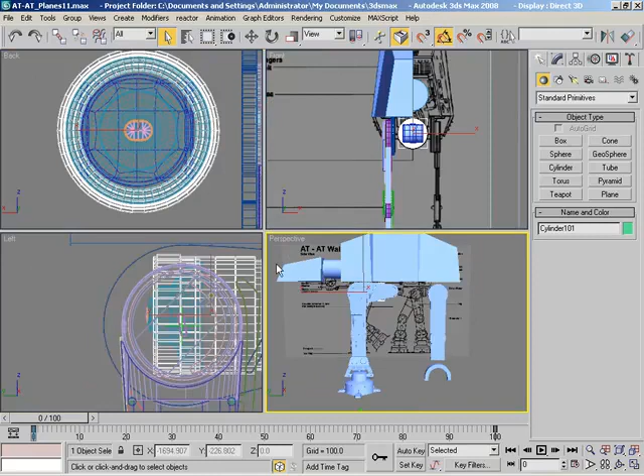In this video, Zach will continue modeling the AT-AT-like vehicle we're creating for UT3. We generally try to keep these videos to about half an hour, but I just don't see that happening tonight. There's a couple things I want to do real quick, like grabbing these pieces and some other bits and pieces at the Transdrive.

Shift and Alt to add to your selection. All I want to do is center up the piece we were making to the Transdrive so it kind of fits around there. It doesn't have to be exact, we can make it exact later, I just want it close. Okay, so now I'm happy.

There's a lot of things we can do to the Transdrive, but before we do, I wanted to show these fine gems off. These were images sent to me by 3D Buzz's own Count Zero over on the forums. I remember his first name is Julian, but I can't remember his last name, and I should have written it down before we started recording, but I didn't, so my apologies. This is some photos of a master replica's studio model, a replica of the studio model.

Fantastic reference images. I have a master replica of Darth Vader's lightsaber, which is absolutely fantastic. Actually, I have two of them, the neon one and the regular one. They do a really, really good job, so we're going to be able to get a lot of detail from this.

You can already see some things on the Transdrive we could take a different approach on, like these little tiny ridges that run all the way around. I was thinking about this - you could model these, or you could probably add them into the normal map later manually if you wanted to. Very easily get away with a normal map, and you just texture those in when you go to create it. But we're not even going to worry about that right now.

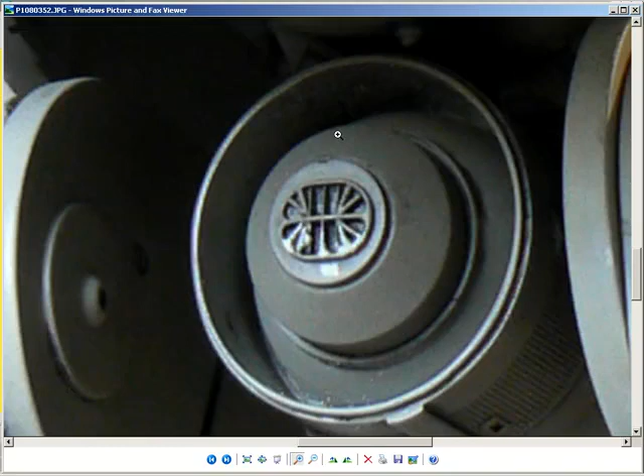I'm more interested in getting more of the geometry of the Transdrive in place. I'm noticing, taking a look at that front little funky symbol - yours turned out pretty darn close to that. It was alarmingly close just from seeing a couple of reference images, but that's cool, it makes me kind of happy. I did something right anyway.

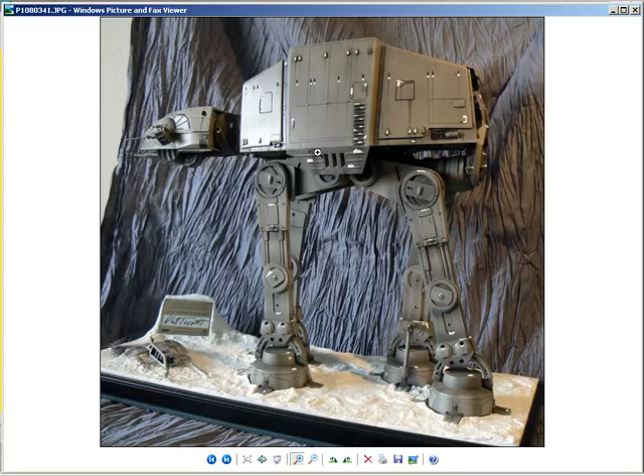There are some differences between this and some of the things we saw on screen, but we've seen that there are differences with just about every image you've opened. Exactly, so really it's just picking and choosing which ones you like best to incorporate. So anyway, the next thing we could tackle is actually starting some modeling.

That'd be such a nice picture if it were in higher resolution. You want to go ahead and get the back leg in place and its plate that it connects to, so that I don't have to actually do any modeling for a minute - I can just fool around for a few minutes while we line up where the back of the Transdrive is going to be.

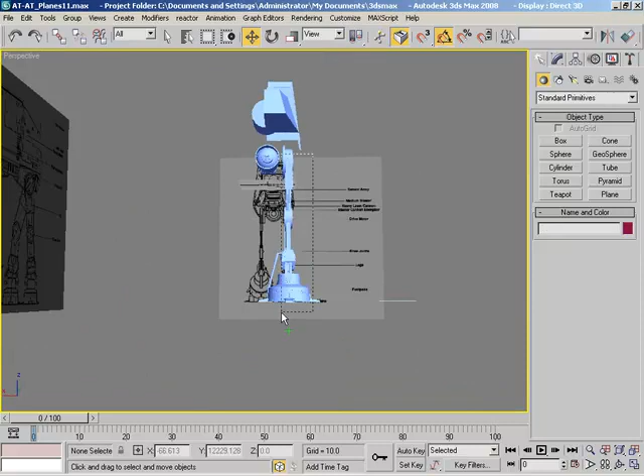Let's see here, if I can do a really clever marquee selection there, and then another one down here - I think that's everybody. Just to be on the safe side, because I'm picky, let's group this and call it R_Foreleg. I don't know, did it grab that too or something? Oh, it doesn't matter, it's fine.

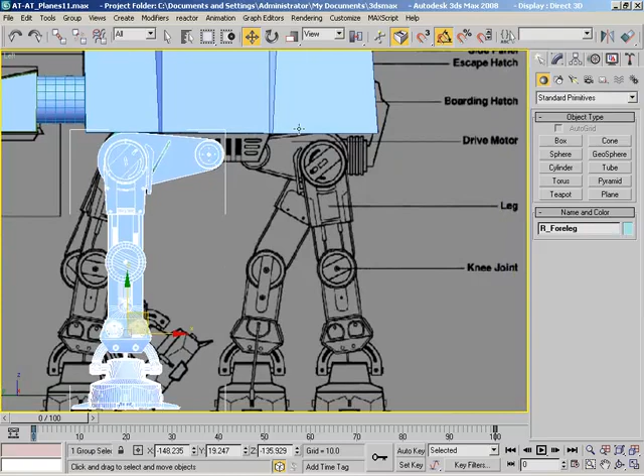Okay, so now we just need to mirror this over. I'll jump over here, let's hit F3 so we can see vaguely where this is going to go on the image plane. Let's hit the mirror button, and we want a copy, of course. Let's just see if we can kick up that offset - oh, the spinner is slow today. There we go.

That's interesting. It's like the plate is... like the back plate's not the exact same. That's something I wouldn't have guessed either. But that can just be adjusted. Yeah, of course. So we'll get the leg kind of in place and not worry about the rest of it.

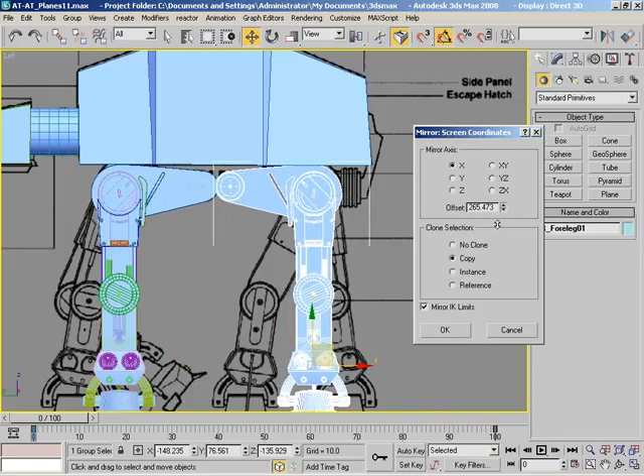So that's pretty close. And click OK. I mean, everything else seems to be lining up pretty well.

Okay, so I want to investigate this. What's this all about? Oh yeah, I have that modeling material on. Wasn't that a handy decision? So yeah, that is much longer.

It'd be cool if we could, let's see, what about that great big picture that Count Zero sent us? I don't know, I'm doing the whole put-your-fingers-against-the-monitor thing and putting smudges on it.

And it looks like to me they're about the same length. In fact, from this angle, it actually looks like the back plate is longer. And that, who could tell from that? Any other images? Oh, I've got images coming out of my nose.

That looks pretty even to me, but that's from way back here. These are the troubles that trouble a modeler. Did I skip anything good? Not really.

All right, back up. Right here? Yeah, just you're at that funny... I'm looking at something different. I'm looking at how much space is between the two. Like, between here, yeah. How close is that?

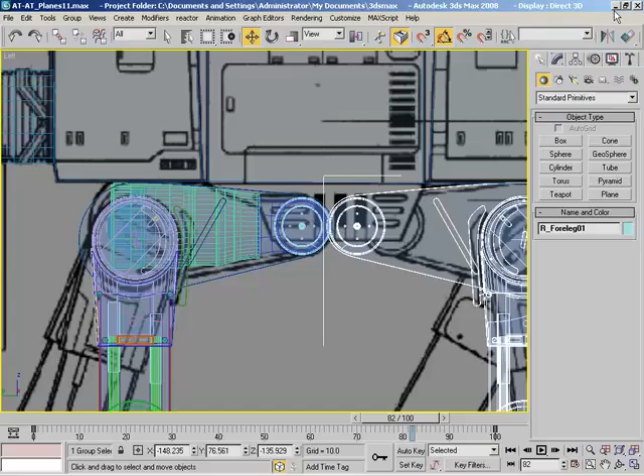Because yours obviously don't overlap at the moment. Well... do they? No, but that would never work mechanically speaking.

So I think a compromise between where it's at now and the other one. Maybe just slide it back to here and kind of call it, because it seems like they should be sort of centered up underneath this armor.

That is something that I felt like I'd kind of noticed. Almost like this little plate of armor here drops down almost to protect those. Because really, if you could get a good shot at those, this whole thing is useless. It's done walking anyway.

Ooh, and these could be useful. Maybe, if the guy would just back the camera. It's like you just want to talk to the photographer. It's like, could you just take a step back?

If you kind of interpolate again, I got my fingers on the screen again. I'm still getting this about the same size.

So it looks like we may have just discovered inadvertently an interesting discrepancy in the image planes. Unless I'm just completely out of my gourd.

Useless, useless, useless. Maybe kind of useful, even in that this is not really an official model, but still. I'm trying to be all precise. Yeah, I'm getting the same size again.

Okay, so I say we just kind of try not to make a user view and just do a compromise and leave it maybe right about there. Okay, so that solves that one.

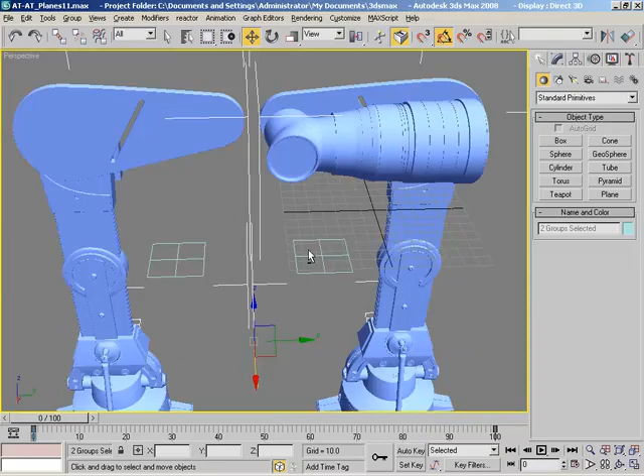All right, so let's see. From here, there are a few more things to this front piece of the Transdrive that we need to add. Of course, we need to go ahead and get this connected over. And there's an interesting connection that takes place there.

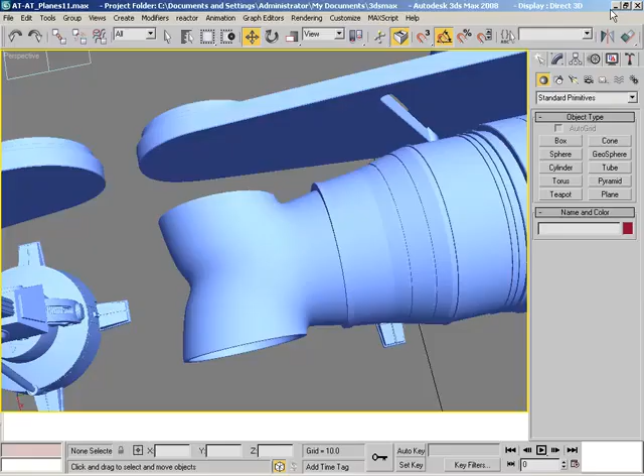I could just go ahead and model it, or I could take a minute and try to point out what I had seen. Let me just go ahead and model it, because we've already been looking at pictures for a while. Sure, let's just jump over here, and I'm going to kind of shade things down a little bit so I can see through.

I'm not really paying attention to the image plane so much as I am just trying to make sure I can see all my geometry. I'm going to create a cylinder, and something like that will probably work. Give it some amount of height. I have no idea how much, nor am I really concerned with all that.

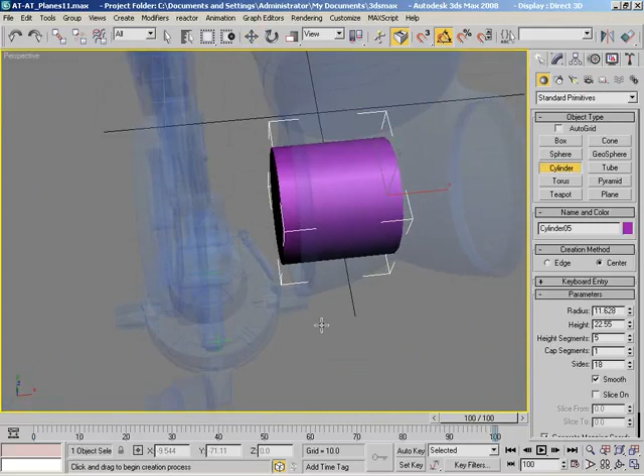Now let's give it a little bit of partial shading.

I remember the old days when I was using Macs, and granted it could have been a video card thing back then, when it wouldn't do smooth transparency like that. It would get all spotted and dissolvey.

Dissolvey, nice word. Well, it's not mine, that's like from Photoshop when you use the dissolve blend mode, because that's what it looks like. Don't pick on me because I said the word dissolve. I'm just saying, nice word. No, I heard the tone, man. No, I heard, it was honestly a nice word.

Okay, let's see, 21, 22, 23, 24, and then I can maybe grab these guys and maybe lose them. I don't know here, let's see. Let's go ahead and convert this.

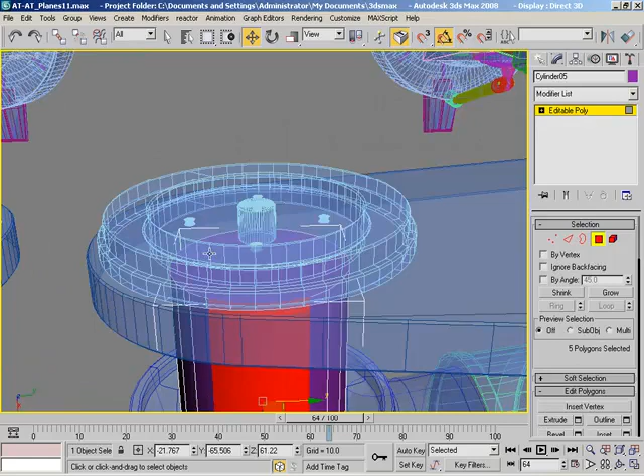I'm not too worried about nickeling on something that we're only going to see, we're never really going to see it edge on. So let's convert this over to a poly. Let's hit 4, and 1, 2, 3, 4, and 5, and 6, and of course...

Okay, and I'm almost reluctant to kill out these two guys. Almost like I wish I had a face or two more, but I'll go ahead and do it anyway.

Hello? Max is taking a second to think about this action. Well, we'll give it a minute, we'll give it a minute, because I really don't want what I think is about to happen to happen.

So how about that radio show tonight? Man, that radio show was awesome. I wish we had more radio shows like that.

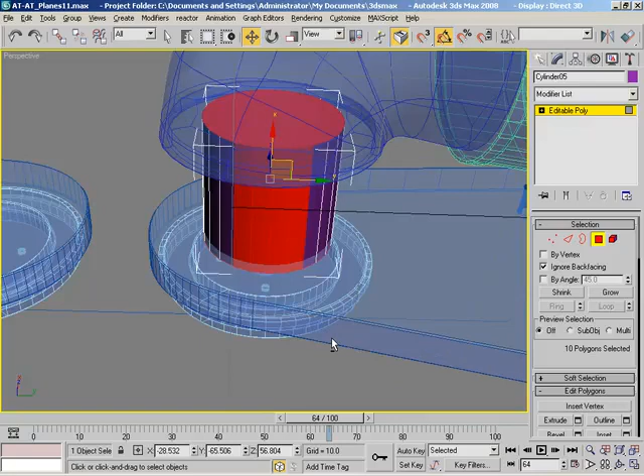I wonder if I've just lost my viewport. Yeah, I just lost my viewport. I don't know what that was all about. But now I hit delete and everything's fine. So, hey, don't knock it.

All right, so now let's jump back in here. Let's go to edges. And I'm going to bridge from you to you, and from you to you. It's fantastic how easy that works. Now with that done, let's get out of bridge altogether.

Let's grab these two, I'm going to do just a little bit of extruding. Wow, that's not just a little bit of extruding. Say something like that. In fact, beveling might have been a little more prudent, but that's okay.

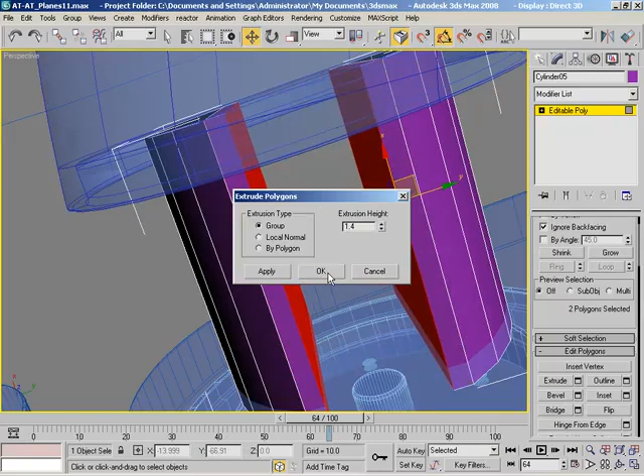Let me see if I can do a tad of scaling. It's just kind of making that look a little more rounded. That's all I'm doing. And I'll get rid of these interior faces because we don't really need them anymore.

So what we've got, what I'm basically trying to create here, is this piece that is like two halves of a cylinder, or sections of a cylinder, that are sandwiched together with like a block in the middle. And this block is going to have a shaft running through it that actually connects to the underside of the AT-AT. It's almost like there's a suspension system here, which does the dual job of kind of stabilizing the Transdrive and acting like a shock absorber for the leg.

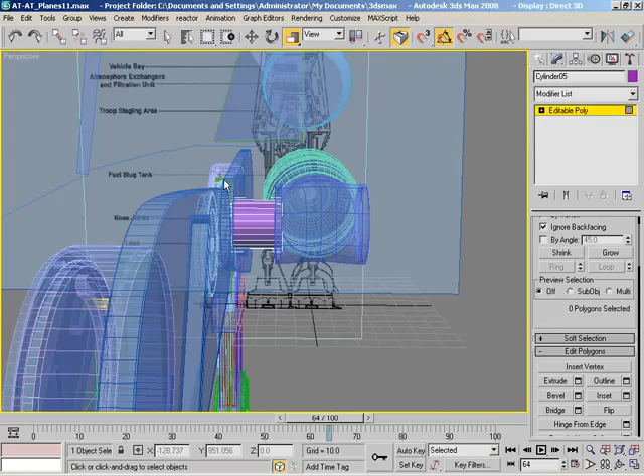Gotcha. Or at least that's the impression that I get, you know. Not that I designed it. Sounded like you went to the Imperial AT-AT school or something. I would so sign up for the Imperial AT-AT school.

I wonder what life would be like as a maintenance officer or something. I'll bet it sucks, probably does, like any government job like that. I bet the hours are bad, the pay's not so hot, if they pay you at all. I mean, it's like the empire, got that whole regimental sort of totalitarian thing going on. So you might not even be getting paid.

Right, okay, let's jump over here. Oh, wrong viewport, don't tell anybody I did that. Let's create a box. Complete with sound effects.

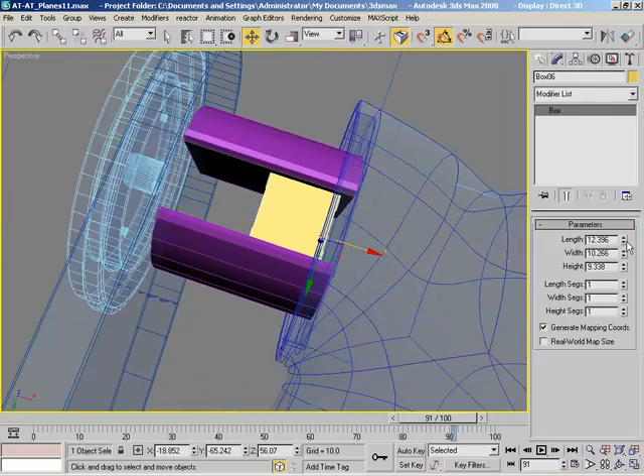I guess we could do it here and then just increase the height, because I don't think I even need to convert this. Let's shade everything up so I can get a clearer idea of what we've got here. What is it, length to thicken that up? Yes. And I don't really care about the top of it because nobody's ever going to see that unless they manage to climb up in here, which I wouldn't allow anyways if it was my game.

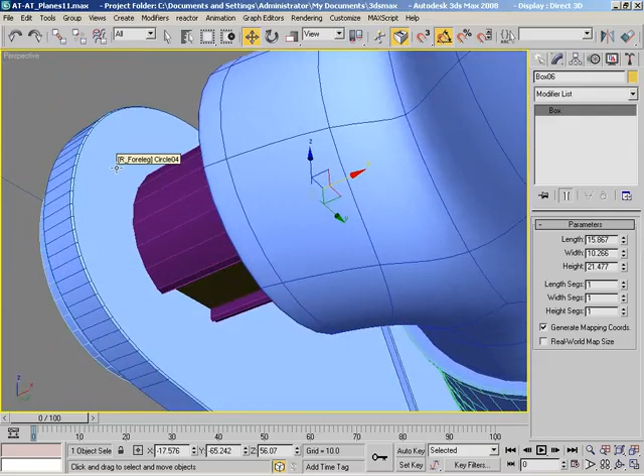We're going to need some sort of cylinder in here to complete that effect, but we'll deal with that in a minute. For now, let's jump back over here to cylindrical creation.

I'm thinking, bear with me a moment. If I want to decorate this and make it look cool, we could do a capsule, or even just a hemisphere. Because really, who's going to see it snaking all the way through up here? I'm just thinking out loud. Let me just do a cylinder.

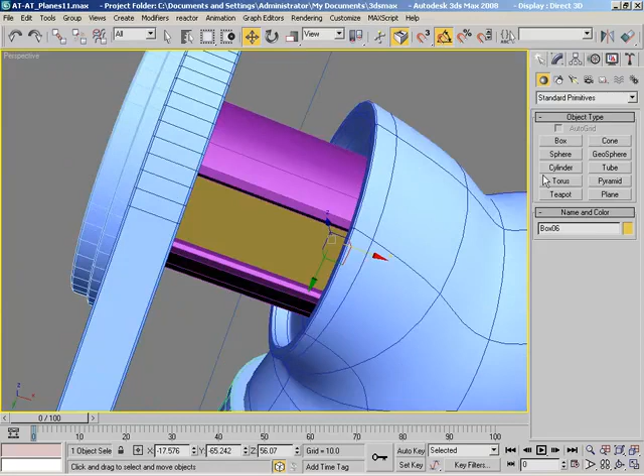We'll turn on auto grid, and we're just going to draw it right here. And there we go, that's not bad.

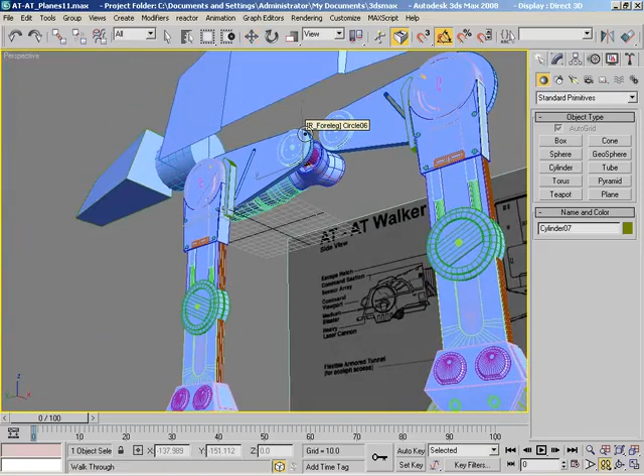Now, just in case somebody's playing on the ground, you gotta think of it this way too. Here's your player's perspective - if you're on the ground, I'm gonna hit the up arrow key, and if you look up, how often are you actually gonna see this kind of thing? So let me hit escape to get out of that mode, and I'll make this run out of the top of this.

But I'm not going to do any embellishments to it. I mean, there may be some sort of interesting shock absorber system up here with computers and hoses and ratchet points and things like that. But for our purposes, I think that's kind of going overboard.

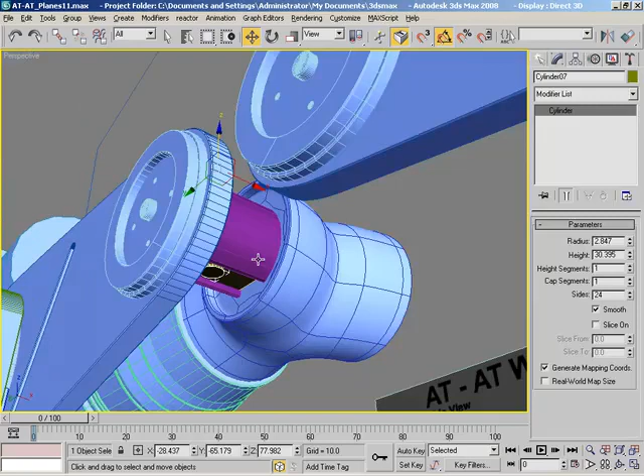I know there's models out there that are like that. In fact, Count Zero's kind of making one. His model is looking awesome over on 3D Buzz. He's doing a fantastic job over there.

Let's convert this to an editable poly, and I'm just having fun with this. There's no real agenda here aside from just making something that I think looks kind of cool.

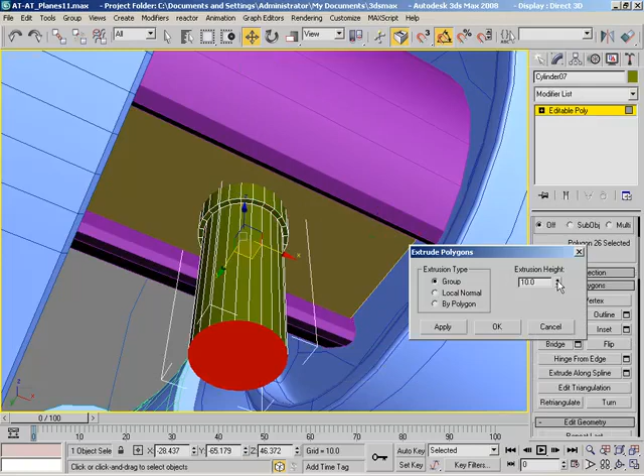So let's do an inset, but not quite that much, and an extrude, but not quite that much - kind of an ongoing theme here. Then we'll do another inset, but a little more, and then a little tiny extrude. I'm making this up so much as I go. And then we'll do a bevel.

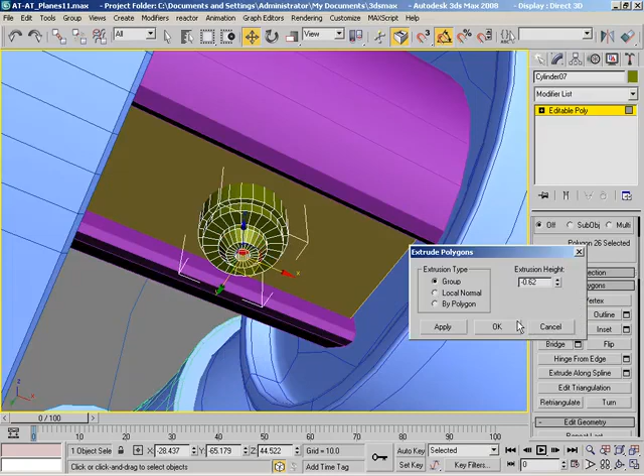Wow, that's not good. And then we'll do another inset, and that's way too much inset. And then an extrude that actually goes inward. And there you go - just some random, interesting mechanical piece, 9,000.

Every time I say 9,000 now, I always think of Stephen Hughes, who, one of the many times I've said that, because I've been using 9,000 forever, without missing a beat, goes, what is that, an upgrade from the 8800 model?

All right, loop. And let's chamfer at least that one piece just a little bit, just for the fun of it. I don't think we really need to chamfer anything else. Probably didn't need to chamfer that, but I wanted to do it anyway.

Okay, so let's grab all these guys, hit the M key, drop on our material, hit F4 so we can put away all of our stuff. And, you know, if we're walking around underneath this thing, that's going to kind of work.

It might be cool, in case somebody does - maybe they are right here between the feet and they catch that - it might be cool to thicken that up a little bit once it gets up here. So here's what I'm going to do.

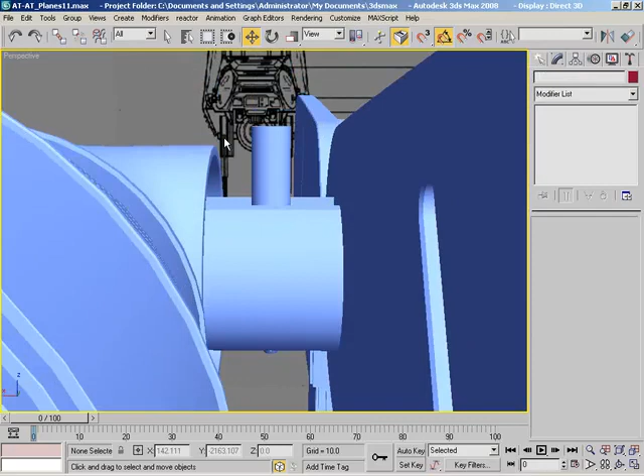Let's grab you, hit 4, grab this guy, we'll pull him down a little bit. You could do an outline - no, I don't want to do an outline, cancel that. Let's do a bevel, so I can go up and then just do this. And then let's do an extrude. I have no idea how high up that should go.

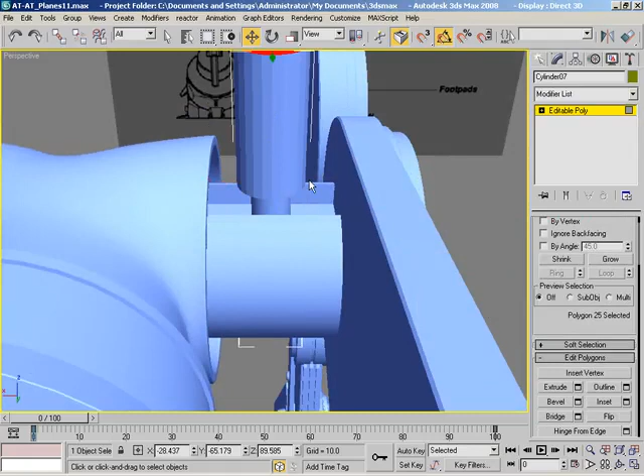Once we get the armor shell out here done, then we're going to start filling in what takes place underneath it, because it only makes sense to do that when we can build inward a little bit. So this will just kind of hang here for a while - it's just hanging out, man.

You know, like we were doing on that radio show. Yeah, just hanging out, man. And getting in trouble because we're saying awful things. We were not - okay, they weren't that awful. Nothing that I'm going to get my mom called over. And by the way, if you know my mom's number, please leave her alone.

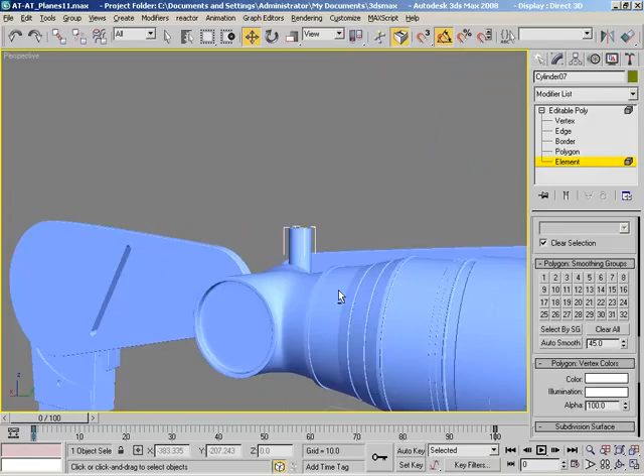All right, so that's looking good. We need to put a little cylinder over here. Can I steal anything? Can I reuse something? Because I'm lazy, I don't want to keep modeling stuff.

Let me ungroup this, or at least detach it or something. What are you, and can I steal you for the purposes of laziness? Yes, thank you. Yeah, maybe, just try it. Yeah, I mean, you don't know until you try.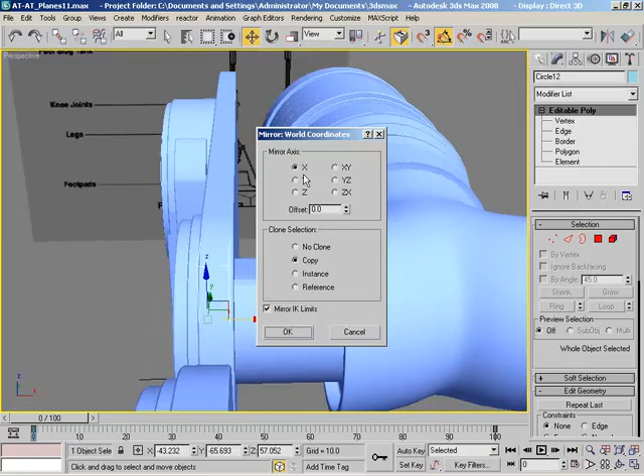Let me try mirroring it. And is that... I think that might have even been the proper direction to mirror it. That'd be creepy - oh my goodness, that worked on the first try. That doesn't ever happen.

And then I might just take this and even out the distance. And there you go, that looks cool. I don't have a problem with that. No, it looks like it's supposed to be there, even. Two points for me.

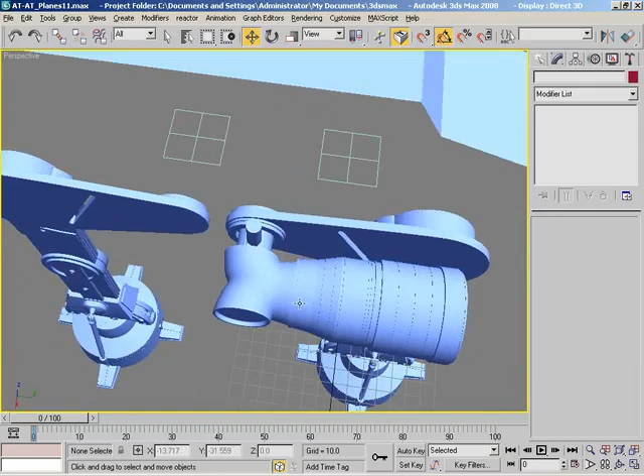Okay, so we could go in a couple different directions from here. We could start adding on some of the bits and pieces that are supposed to be on this Transdrive, or we could start creating what's going to become Transdrive 2 for the rear legs. Do you have any opinion on that? It's totally up to you, sir. Man, I wish I was okay with that.

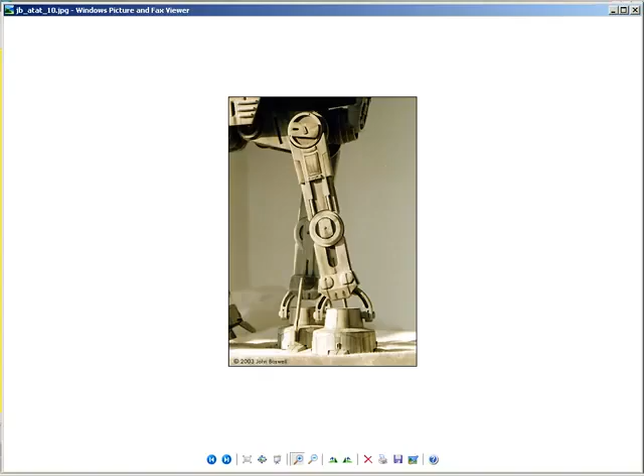You can go ahead and mirror that off if it's pretty much the exact same thing. I think it is. You don't really have much reference-wise. Right, it's not like I think anybody's going to care. So let's just assume it's more or less the exact same thing. Oh, which way did you decide to mirror? Probably the wrong way. That looks right. It's just offset the wrong way.

Yay, actually that distance looks pretty good. From what I've seen of shots from the underside of the thing, we must be doing something right with the leg, even if it's extending out a little far. I just think the image plane is a little whacked. Yeah, well come on, look at the feet. Yeah, and the little skinny chicken legs - it's like they built an AT-AT with an AT-ST frame. Oh my gosh, I just waxed geek.

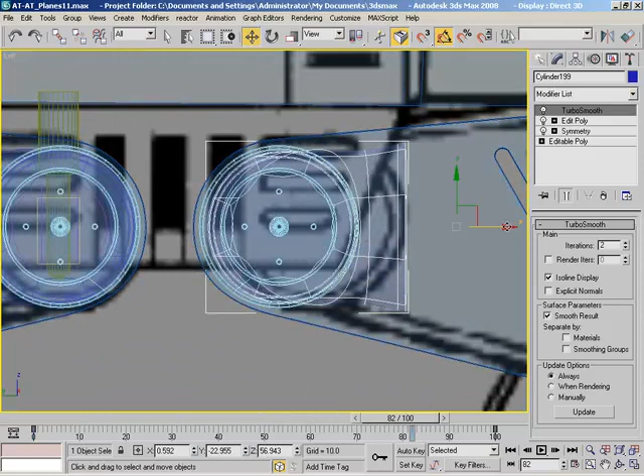So that looks pretty good, enough to get us started anyway. All right, so back over here, solidifying the view so I can do pretty much the same coupling system. Yeah, well, it's gonna be. There you go, it's gonna be. I figure the Empire's gonna reuse parts whenever they can.

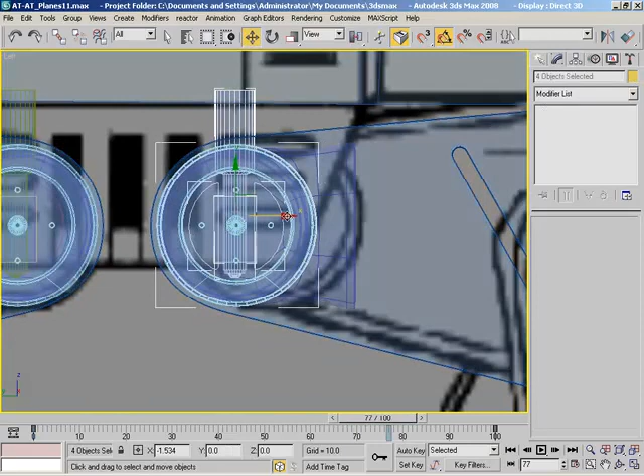You saw those TIE fighters, man, those things look like they'd fall apart if you kicked one hard enough. I wouldn't want to fly in one. I'm just kidding, I would love to fly in one. Get the whole space suit where you look like a blackly clad stormtrooper.

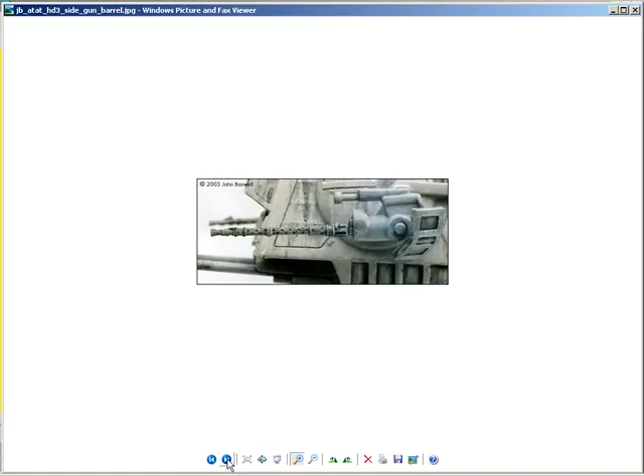That'd be awesome. Okay, so now the rear Transdrive - if we want to go ahead and start that, we can do a detailing pass where we add little greebles and bits and pieces to the whole thing. Let's find a picture that shows what it looks like, or sort of, because I don't think we have any pictures that really show it off very well, and that's kind of the front.

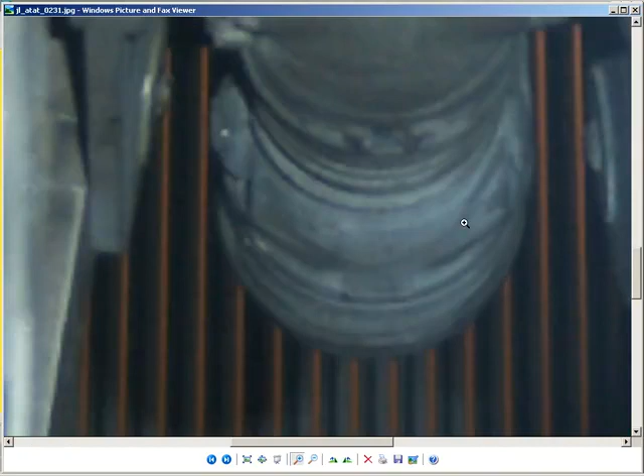Okay, well, we can see another little funny organic T-piece. Let's see how close I can get over here. All right, we've got some funny little openings on the sides with little thingies that stick out. We've got kind of a little - I can't tell if that's either bulbous, like rounded, or tapering outward. We're almost at too much of an angle for me to say yay or nay to that, but it's also one of those things where I don't think it matters.

Now, we do know the rear Transdrive is longer because it actually sticks out the back. It's covered by this funny plate back here. There's a kind of picture of it - not much information there, except we can see that T-piece, and then something hanging off the bottom.

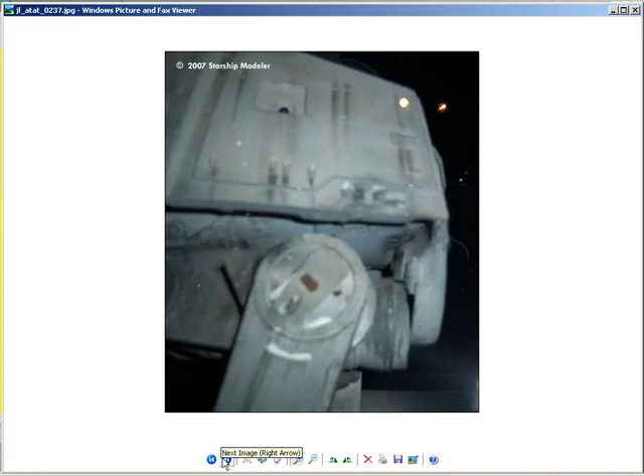But if we make one of those on the front, we can just dupe it over to the back, or mirror it. In fact, it's not entirely impossible that we could start the whole thing off by mirroring the Transdrive we have and extending it, then beefing it up and doing what we need. Exactly, just change your edge loops around and whatnot. Let me give that a try, if for no other reason than it might save us a little hassle. So let's hit the mirror button - and he mirrored the right direction. We just need to really bring that offset down, down, down, down, down, down.

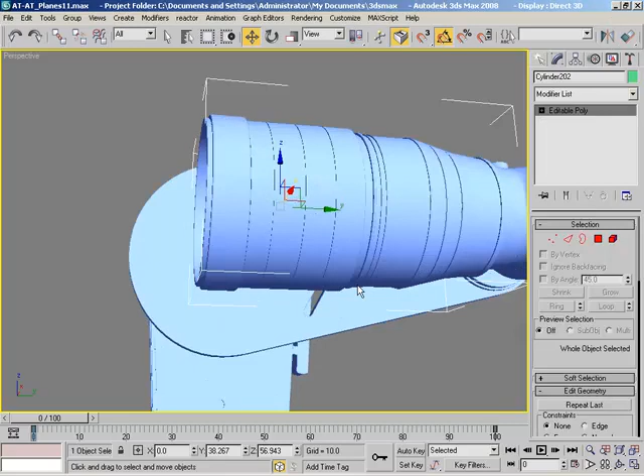That's kind of a cool start. I was like, where did I go? All the lights went out. I scrolled back through the image plane. So if that ever happens, please don't send me an email asking where your model went. I'll be forced to make jokes on your behalf.

Okay, F4 so I can see these. I almost want to take out some of this detail while I work, maybe put it back later, because I'm one of those kind of modelers.

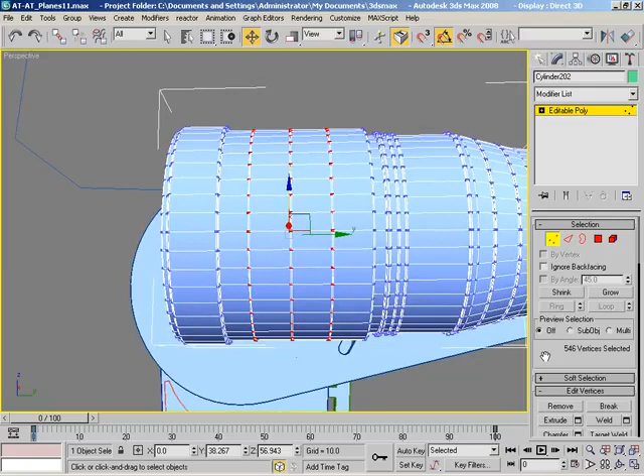Let me see here, I want to try something. A great big weld, would that do it? It seems like it would. Oh, look at that, let me try this. Oh yeah, but it condenses everything down. I don't know, that's not necessarily a problem, it's not even something most people would notice, but I still feel bad about it.

It kind of stinks having a conscience.

All right, let's do it this way then. I'll grab these guys, we'll frame up on them. Let's hit 2 and grab you and you. Oh man, I need to zoom faster than that. I'm impatient. And you, and you. Can I rotate around and get the other guy? Yeah, hello.

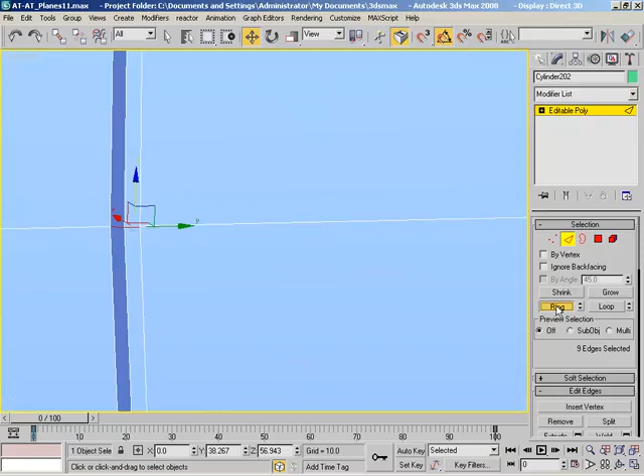Something about doing that made me want to go watch Tron again. Really? Yeah, I don't know what that just was. Yeah, I don't see the connection. I don't know, maybe it's the cheap geometry and no motion blur zipping by. I don't know, it could be.

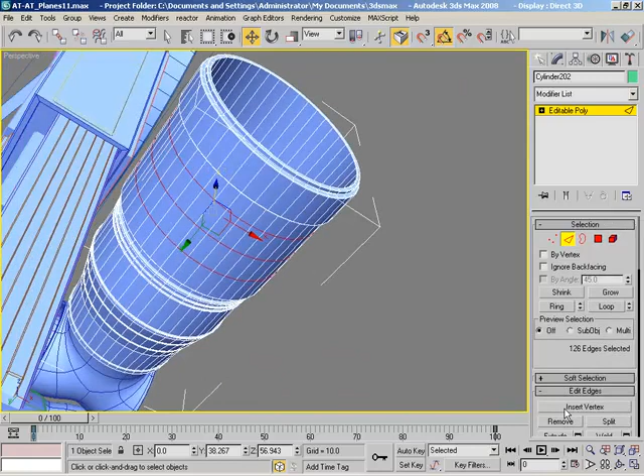Let's grab all of that and convert to polygons and just hit delete. And then if we go back over here to vertices, and of course this would be safer if I was in an orthogonal view, but we can do that anyway. And now if we weld, nothing should condense downward. And then if we just really wanted to be sticklers about it, you get all three of these kind fellows, you could loop them, make sure I didn't get anybody I didn't mean to, and then just hold down Control and remove those edges. So now you've really simplified that a lot.

Now I kind of want to go ahead and do that here too. It's almost like I just want to kind of start from a relatively clean slate. Sure. I still think this is going to end up being faster than extruding something out on my own, recreating a cylinder, converting it, etc., unless I'm wrong.

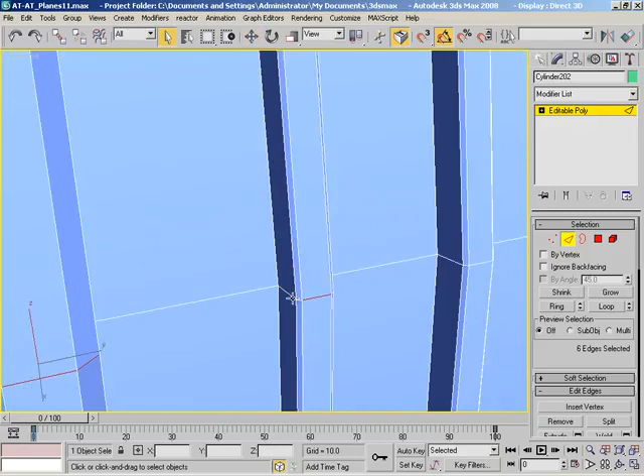Being wrong doesn't bother me though. Really, I swear, because I'm never wrong. Yeah, I hear that all the time. Well, last time it was Jeff who said it. Was it? Oh yeah, it was actually. Yeah, that wasn't me last time.

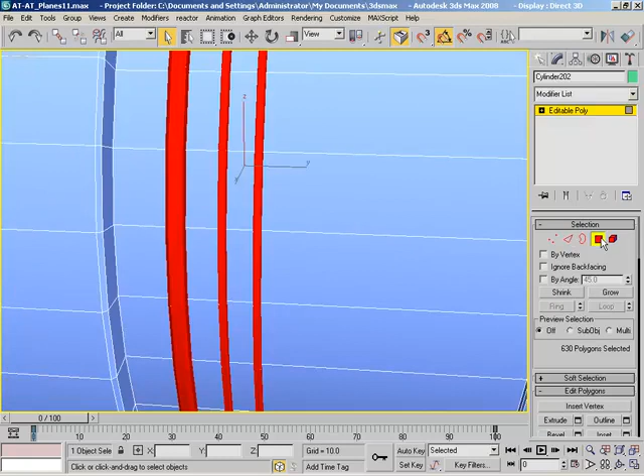All right, cool. Now, ring, convert to polys, hit delete, and grab all the vertices, and do a quick weldy weld. All right, just crank up that threshold. Yay, looks good. Two, grab this guy and his friend, loop, control, remove. Okay, so that's enough for me. Now we can start kind of just plugging along.

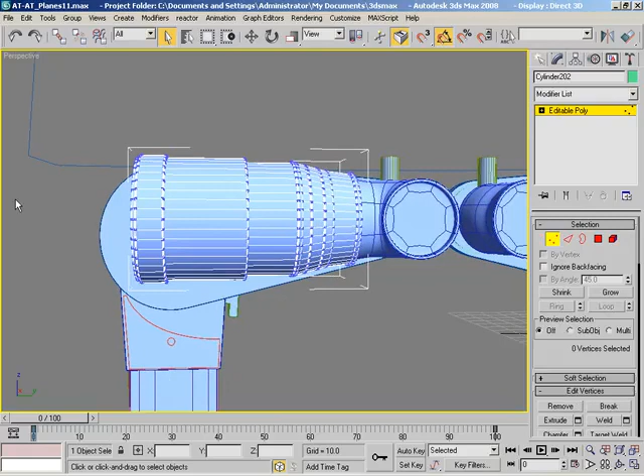So let's, does it do like a beehive? It kind of does, there's like a bulbous area it just sort of goes up and back. But what I wanted to do first off was just kind of get an overall length in place. So let me get back over here in the viewport. I also wonder if it's smaller when it gets back here. I mean, it's shown that it's smaller back here when you get to the image plane, but I'm almost like, the image plane says it, so it's probably not true.

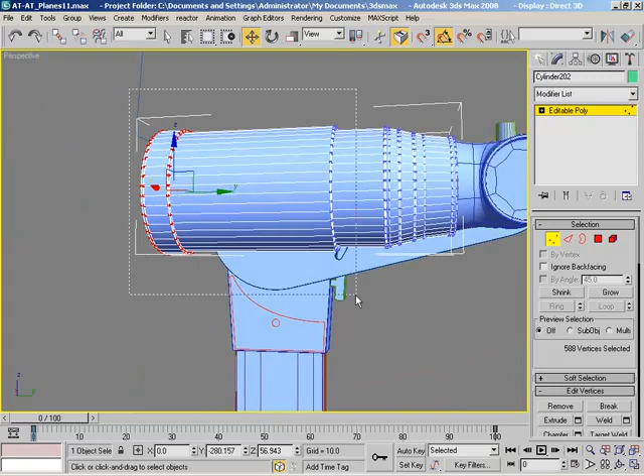Let me try this. I shouldn't be fearing any scaling, but for whatever reason I'm all apprehensive and stuff. Probably can't do that from another viewport, so it's probably wise of me to open two views at the same time. So let's see here.

Now that's a shot from the rear of the thing. Of course, that's shooting all the way down, and it's the image plane, so again we can't really take that as anything useful. I need to quit picking on this image plane, this schematic is actually really good, but I'm just giving it a hard time because that's kind of what I do. All right, let's see, what do we have back here? Because we do have some photographic reference of what at least this part looks like.

Here's what I'm seeing: a little bit like a ring here, then some tapering out, and then a lip. There's something in there that's almost like some sort of nondescript extrusion. It almost looks like a nozzle off of a rocket or something.

I was actually thinking something like that the very first time I saw it. Like they just slide this up, and this fires off like a rocket, and the thing just gallops along, like that episode of Invader Zim when Gir turns into the house.

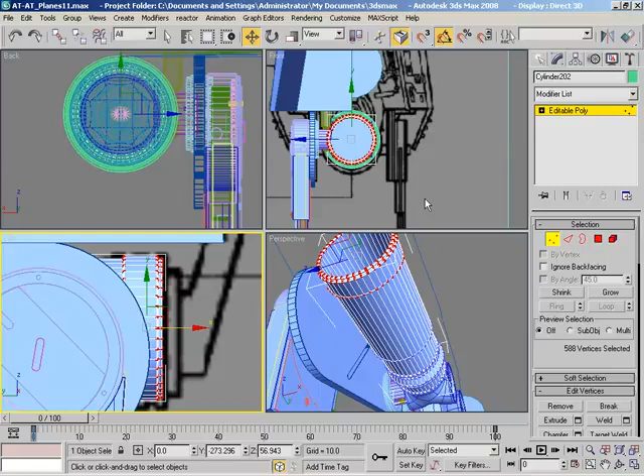Gotcha, that'd be awesome. Okay, let's see. Let me go over here. We'll shade this down a little bit so I can see just a little bit better. What if we pull all of these vertices back?

Because we've got this kind of built-up ring, that could become the ring. Now we can take these vertices. Maybe that's a little bit far, let me pull that back out a little bit.

Now these could actually become that tapered thing. They'd have to be a little bigger. I am officially now ignoring what the image plane says. Good for me. Let's see here, can we just do that?

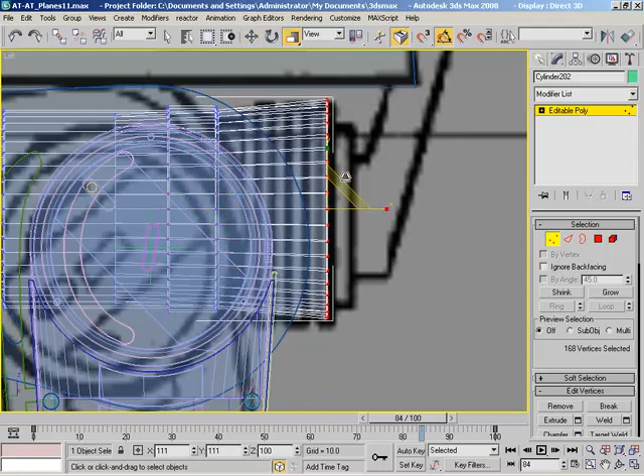It still seems like the whole thing's a little big. Are you feeling that at all? Like maybe the whole thing needs to be kind of... I can't do it from this angle, but maybe from here I can. Or you take the whole thing and kind of shrink it down a little bit. Maybe that's just me, I don't know, it's hard to say, isn't it?

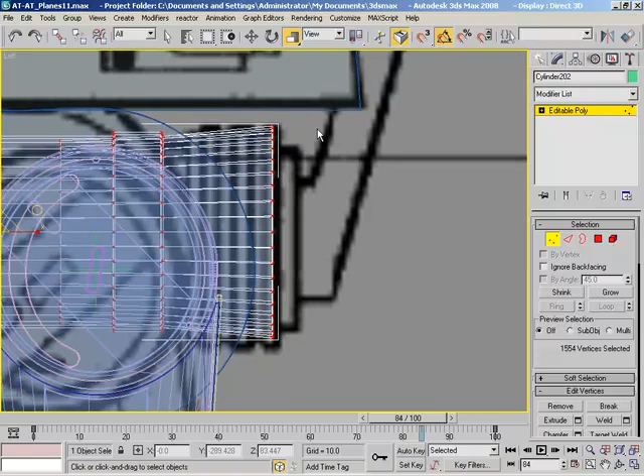Alright, I'll just make a command decision. We'll put it right about there. That's probably enough by way of outward tapering, but we need to pull it back a little bit so we can do a straightly extruded ring that comes out of it. And then it should start to look... we start to be able to tell if we're close, and I think that looks pretty close.

Let me come out here to perspective for a moment, and we need to shade things up so I can see inside. So we're doing a little bit of extruding through. I almost don't care though, because we could grab that. Let me try this, this should be cool if it works. Let's grow that, and then grow that, and then get the scale tool out, and then we can thicken up the walls of this piece a little bit.

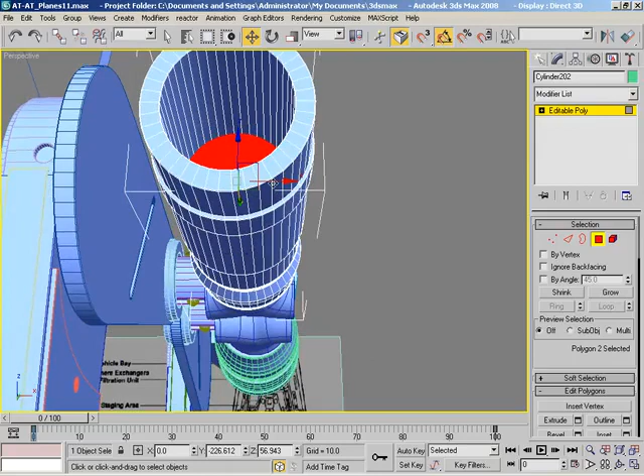In fact, we might need to do it again, because we've got a whole nother extrusion level we have to pull out of there. Not to mention, we could probably grab this guy and slide him... Oh whoa, which direction were you going? Okay yeah, maybe pull him out like that.

Alright, let's see. 2, grab you, hit ring, connect. No, just 1 please, not 2. Almost.

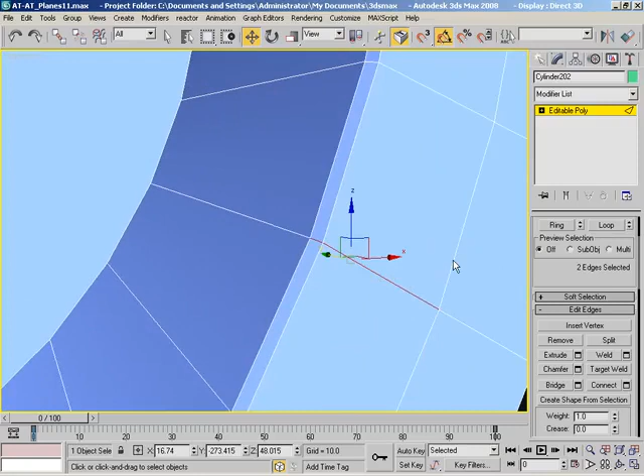I'm thinking, let me see here. If we get this guy, and then we get this guy - this may not be a wise idea, but I just want to try it anyway - and we ring them, and then we convert those over to polygons, and then we extrude those.

Now, which way are you going? You're going inward, I don't want you to go inward, I want you to go positive. And not by local normal, but instead by group. Group, in this case, I think should just be straight back.

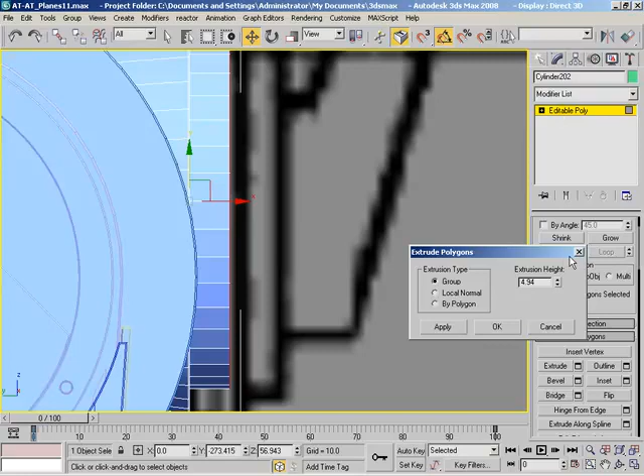Yeah, so let's take a quick look at what we got here. It's pretty close. So let's go ahead, let's pull it out just a little bit more, and then we'll call it. Let's jump over here, and so we were able to kind of rescue one of those bevels.

So we still have it, and we could take this guy and bevel him out as well. Chamfer, bevel, it's all the same.

Okay, so that takes care of that. Now we just need a couple of ridges along here. Now, if you want to get hardcore, there's 4 in all - 4 ridges, but they're basically 2 kind of rings. Exactly. Yeah, fine, just take all my thunder, man.

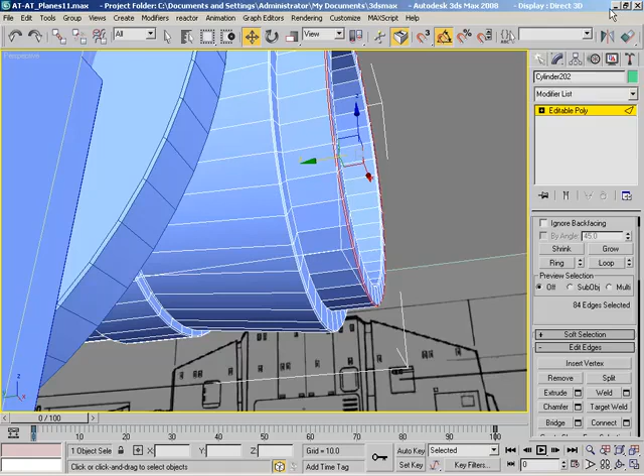Take it all. Alright, so ring and connect, let's just do 2 connections. So 2 segments - oop, no, wrong slider, Zach. I'm gonna pinch those in just a little bit more because I'm putting these right down the center line of those rings. Click OK, do a chamfer, maybe about like so.

And hang on, he's thinking again, because he does that sometimes. Let's take those, and we'll just, instead of clicking OK, we'll click Apply. We'll chamfer those as well.

Yeah, something maybe kind of like so. Let's do that, I'm down with it. Let's put another segment in there, and just click OK. All right.

Now, real carefully, I want this edge, and that edge, and that edge, and that edge. That's it, that's everybody. I just wanted to fly around for a while.

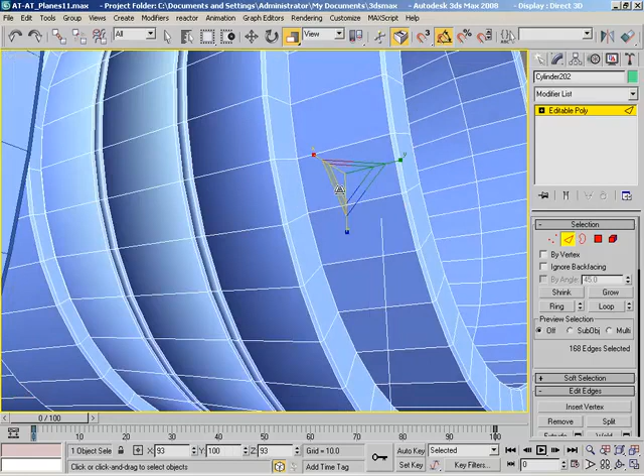And then we'll loop those, and then we'll get the scale tool out, and really carefully we'll just pull these in just a tiny little bit. Will it even let us pull it in a tiny little bit, or do we have to do it numerically? Because I have no spinners. I don't even have scale snapping on. Those really shot in there, didn't they?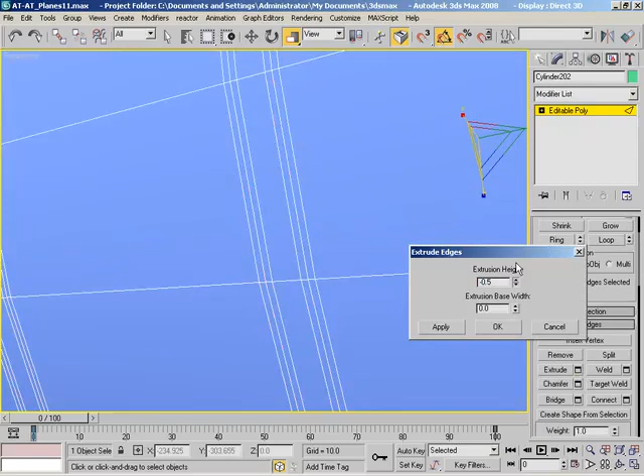I can always extrude them, because that gives me numbers to play with. Let me see how well that'll work. I'm apprehensive, but I'm trying it anyway. So extrude, just zero everything out real quick. Let's pull these in, extrusion base width. We can pull out all the way. That's actually all I wanted to do. Just kind of pinch those in a little bit.

Okay, so we got some funniness going on with the normals. Let me approach that with some smoothing groups. 45 is a little high. 25, even that apparently is a little high. It might, I wonder if it has double vertices there because of that extrude thing. What do you want to bet? 2 vertices selected, baby.

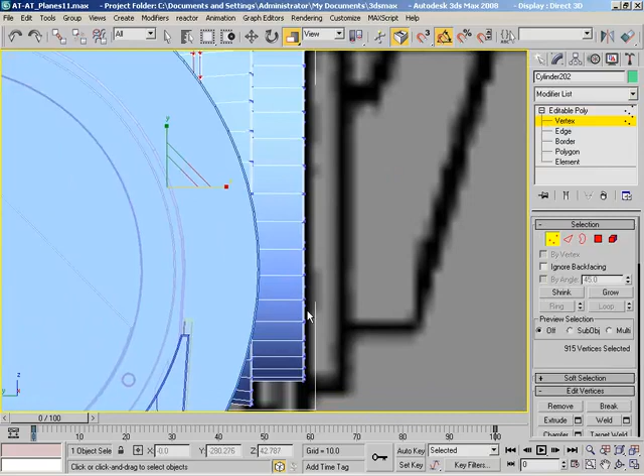Sad, really. All right. Did I get anybody I didn't want to get? Yeah, I should do that from an orthogonal view. This is what happens when you try to be clever. You pay the ultimate price. All right, Control Alt, I don't know what you're doing, but don't do it.

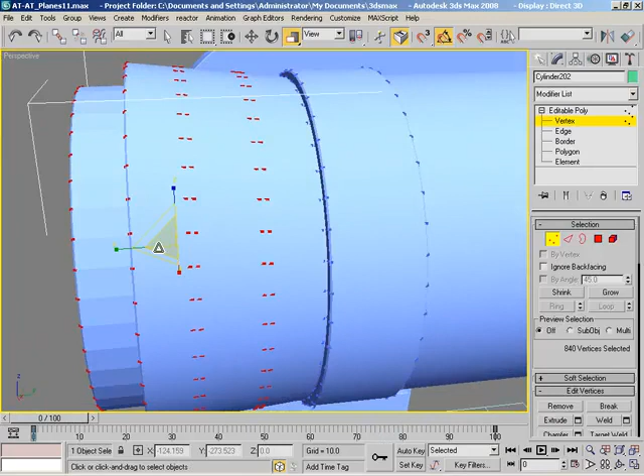Control Alt, pull that out. Wow, that's all freaky and stuff, isn't it? Wait a minute, hang on. Did I undo more than I meant to? All right, hang on, I'm stomping back through my undos because I'm scared now. I feel like I broke something. That ever happened to you?

Oh yeah. All right, there's my edges again. I really just want to scale these. I could... heck with it, I can't be bothered anymore. Goodbye.

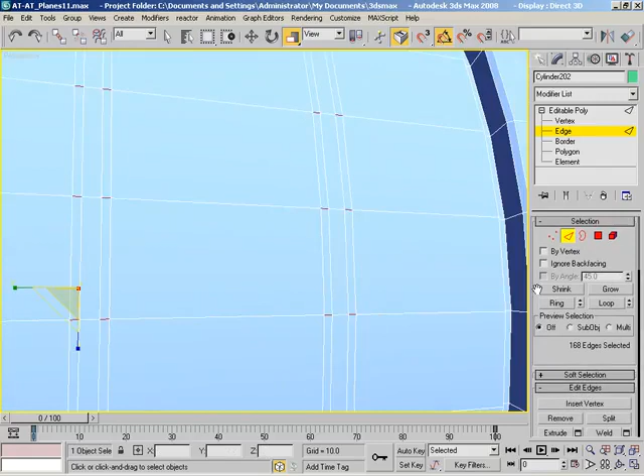All right, and let's see. Let's convert these over, so we need to ring them, convert them over. Fantastic, and I'm going to bevel them. So boom, boom, and we'll pull in the height a little bit, go by local normal. And let's bring in the outline amount a little bit.

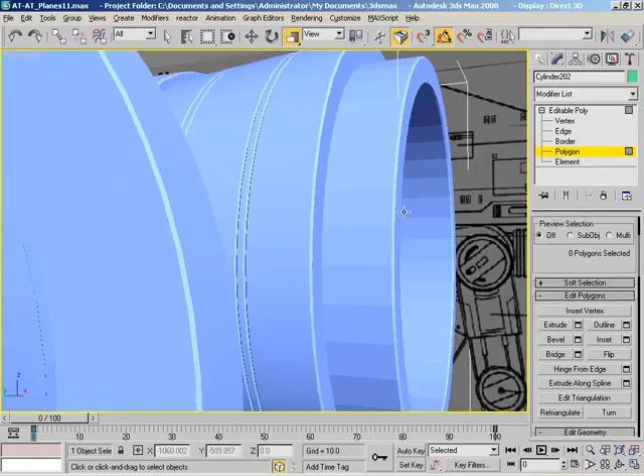And there we go. So if you can't kill them one way, kill them another way. Let's hit F4, there you go. Looking good. All we had to do was sacrifice a small animal, declare a small land war. All right, now this big fat band has also got a couple of rings on it, so let's go ahead and knock those out while we're here.

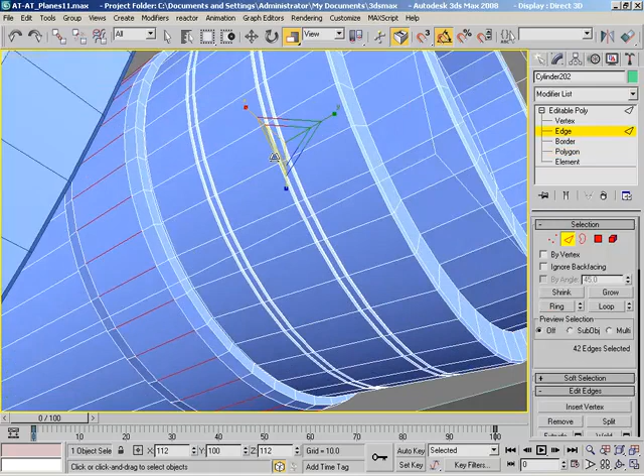Jump back over here, grab these guys. I'm thinking that we could probably take these edges and shrink them in and start to get that kind of tapered effect, and maybe just fatten the whole thing up a tad if it'll let us scale these a little. Will you let us scale those a little bit? It's kind of like, no, I won't. That's okay, let's not worry about it then.

I just want a ring on either side of that. Got awfully quiet over there in the peanut gallery again. Oh, I'm just watching.

All right, we'll increase our amount real quick. Jump in here. Oh, I hate it when I do that. Make sure you hit OK. That pesky old assuming the operation's already done thing. Okay, now we'll bevel these as well, and actually that should probably work.

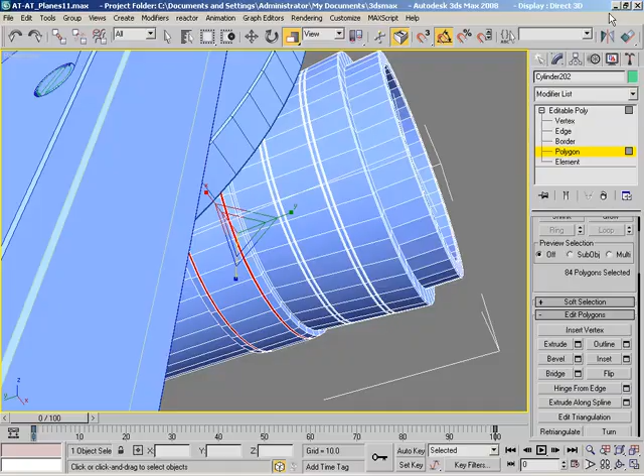Okay, so we kind of have that. Now here's where we really lose what's going on, and from here on out we're just sort of kind of making it up. Right, now here's what I think as I get all quiet.

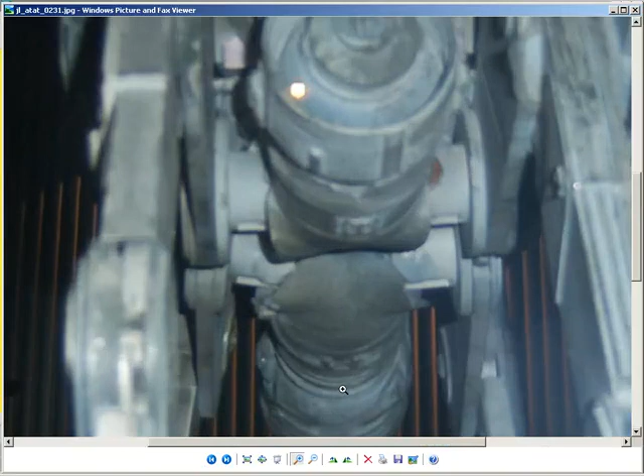Let's see here, we got that picture that kind of shoots right down this thing. From up, yeah, there we go. Yeah, see, it seems like it kind of bulbs out. Yep, that's what I'm getting. And at the same level of that bulbousness, there are these funny little openings on the sides, which I'm going to kind of make up. I think I know how they work. Okay, but we'll just make something that looks kind of cool.

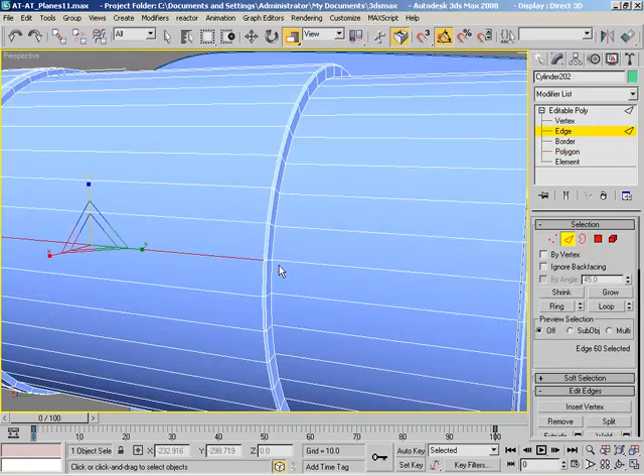Still, just to make my life easier with making something that is bulbous, I'm going to do something a little bit wild here. Actually, let's do this at the edge level, it'll be easier on me. Let's see how far I want to push this.

Would you like for me to write a tutorial? Would that make it a little easier? Oh, you want to start a fight? I see, okay, I was just trying to be helpful.

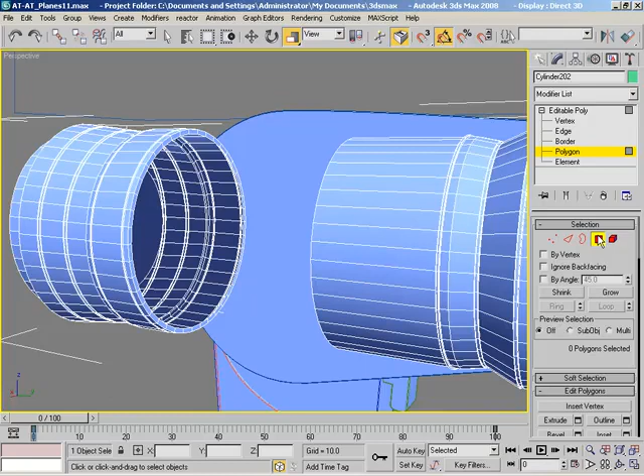I'm going to create the little bulbous piece out of separate geometry so that I can make use of something like Turbo Smooth. I don't want to Turbo Smooth something with a whole bunch of edges.

I thought we were friends, man. All right, let's see, boom, loop. You make a tutorial, I'm just trying to be helpful. All right, great.

Let's jump over here to one of the front or back views, doesn't really matter which one. I'm going to make a new cylinder.

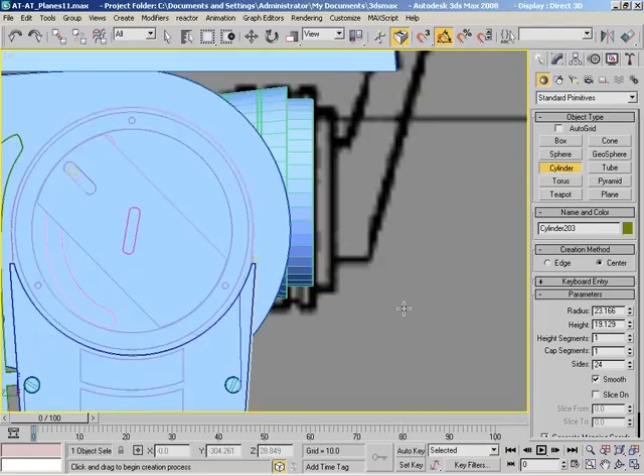You make a tutorial. Oh, let's turn off auto grid. No, just back off, man. Don't do it, don't do it. I heard it, man, I heard it. It registered. And this is like primetime television. I don't know if it's a drama or a comedy. Dramatic comedy, do they even have those? I'm sure they do, because if you don't have a movie that falls in a genre, you get to make one up. Okay.

Fantastic. I'll pull in the radius a little bit, slide this over, and increase the height a little bit. I want to kind of fit this in. I don't mind it being a little bit bigger. We can always taper this out to match it, so that's not a concern.

Let me go ahead and align it. Let's see, is it Z that I don't need? No, it's not Z that I don't need, it's Y that I don't need. So there we go, that should be all nicely aligned.

Now our sides, that's where stuff starts to get cool. We can pull down the number of sides, let's say down to 12. What I'm looking for here is a number of sides that wraps around either side, and 12 might not even be enough. Maybe 14, it's got to be an even number because I need the same number of sides on each side. And then I'm going to end up making some edge loops from which I can take a selection of faces and just extrude them in. That will create my opening.

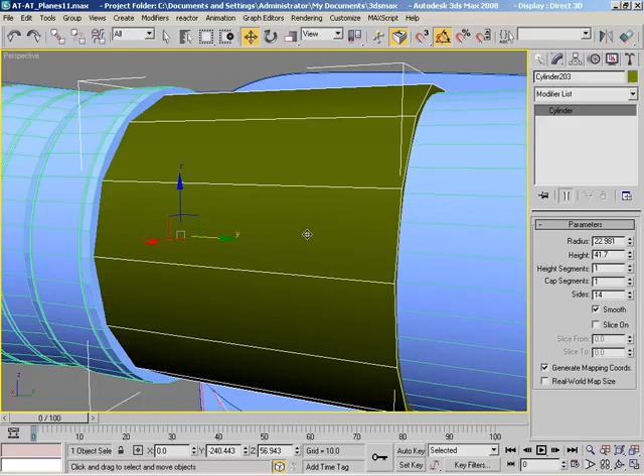Now, before you get much further, I hate to do this. We've got two very interesting things going on. One, it's almost 40 minutes in. Oh really? Yep, I feel like we just started. And two, we actually have a wild fox right outside the office who seems to have gotten a bit restless tonight. I don't know if somebody's out there trying to play with him or what. Probably one of the cats. Well, we still got some good progress in. Yeah, we've got a good start on the other one and the second leg in place.